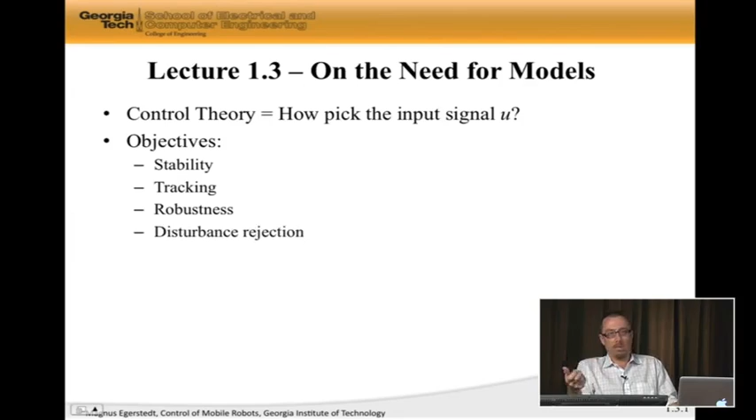I'm calling it robustness. A companion to robustness, in fact, one can argue that it's an aspect of robustness, is disturbance rejection, because at the end of the day, we are going to be acting on measurements, and sensors have measurement noise. Things always happen. If you're flying a quadrotor in the air, all of a sudden you get a wind gust. Now that's a disturbance. If you're driving a robot, all of a sudden you're going from linoleum floor to carpet, now the friction changed. So all of a sudden you have these disturbances that enter into the system, and your controllers have to be able to overcome them, at least reasonable disturbances, for the controllers to be effective.

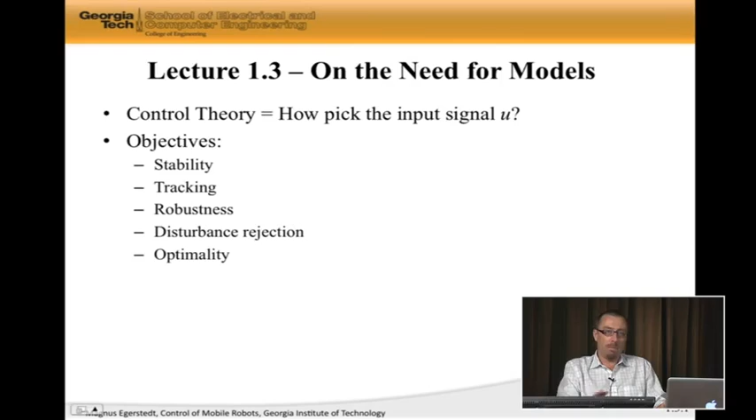Now once you have that, we can wrap other questions around it, like optimality, which is not only how do we do something, but how do we do it in the best possible way. And best can mean many different things. It could mean, how do I drive from point A to point B as quickly as possible, or using as little fuel as possible, or while staying as centered in the middle of the road as possible. So optimality can mean different things, and this is typically something we can do on top of all these other things. And in order to do any of this, we really need a model to be effective.

So effective control strategies rely on predictive models, because without them, we have no way of knowing what our control actions are actually going to do. So what do these models look like? Let's start in discrete time. This means that what's happening is that at distinct time instances, things happen.

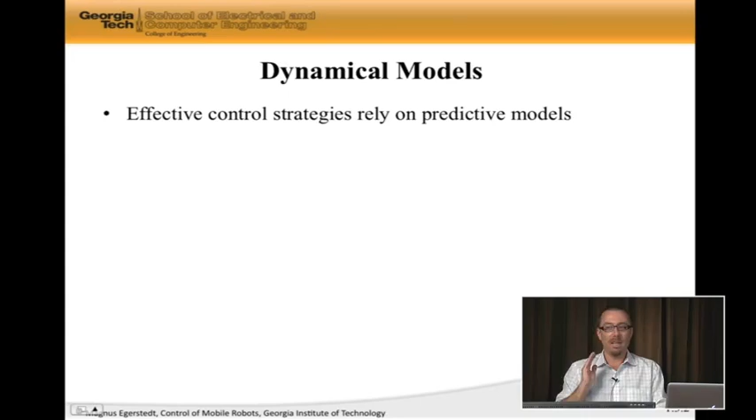In discrete time, what we have typically is that the state of the system, remember that x is the state, so this is at time instance k plus 1. Well, it's some function of what the state was like yesterday at time k and what I did yesterday. So the position of the robot tomorrow is a function of where the robot is today and what I did today. And then f somehow tells me how to go from today's state and control input to tomorrow's state. This is known as a difference equation because it tells you the difference between different values across different time instances. So that's in discrete time.

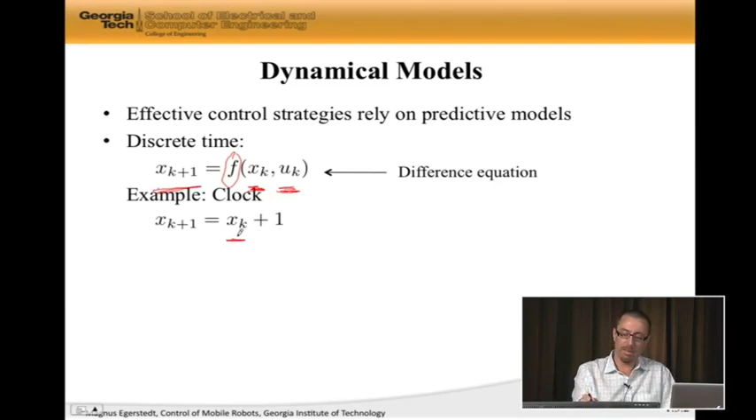And here's an example of this. This is the world's simplest discrete time system. It's a clock or a calendar. This is the time today. Now I'm adding 1 second, and this is the time 1 second later.

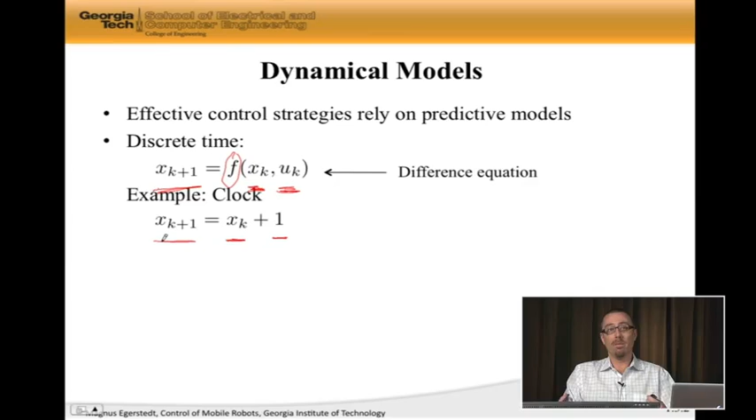So the time right now plus 1 second is the time 1 second later. This is clearly a completely trivial discrete time system, but it is a difference equation. It's a clock. So if we plot this, we see that here is the state, which is what time it is, as a function of time. So it's silly, but at 1 o'clock, the state is 1. At 2 o'clock, the state is 2, and so forth. And you get this thing with slope 1.

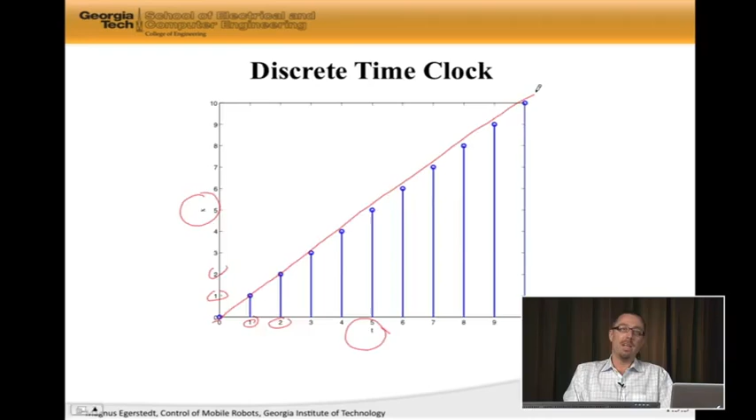So this would be the world's simplest model. There are no control signals or anything in there, but at least it is a dynamic, discrete time model that describes how a clock would work. Now, the problem we have with this, though, is that the laws of physics are all in continuous time. And when we're controlling robots, we are going to have to deal with the laws of physics.

Newton is going to tell us that the force is equal to the mass times the acceleration. Or if we're doing circuits, Kirchhoff's laws is going to relate various properties to capacitances and resistances in the circuit. So we're going to have to deal with things in continuous time. And in continuous time, there is no notion of next.

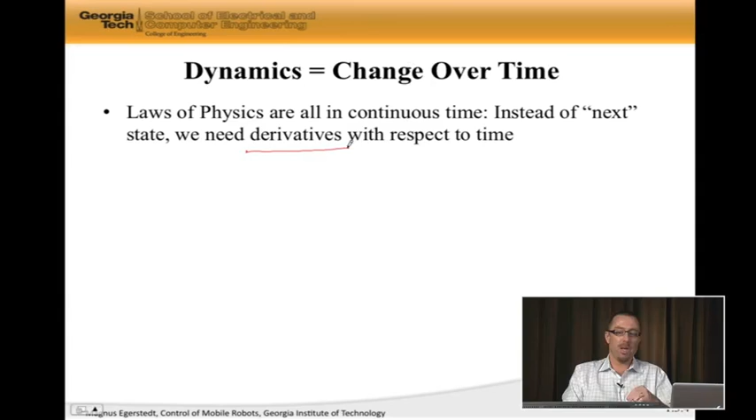But we have something almost better, and that's the notion of a derivative, which is not next, but it tells us the change with respect to time. So in continuous time, we don't have difference equations. What we have are these things called differential equations. And right here, you see that the derivative of the state with respect to time is some function of x and u. So this is not telling me what the next value is. It's telling me what's the change, instantaneous change.

And here is the same thing, but now I've written x dot instead of dx/dt. Time derivatives a lot of times are written with a dot, and I'm going to use that in this class. And this actually traces back to the slight controversy between Newton and Leibniz. So in 1684, Leibniz said, oh, I have this idea that I call differential, and Newton at the same time had the same idea. Well, this is Leibniz notation, and this is Newton's notation. And we're going to use the dot for time derivatives here.

The point is that these are both the same equations, and they are differential equations because they are relating changes to the values of the states. So if we go back to our clock, what would the differential equation of a clock look like? Well, it would be very, very simple. It would say that the rate of change of the time is 1, which basically means that the clock changes a second every second.

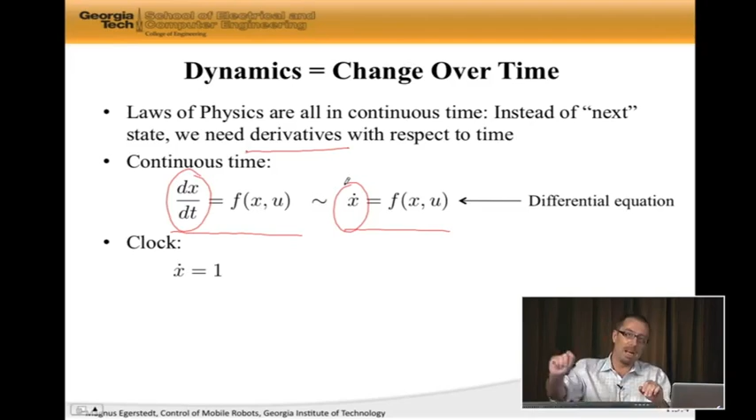That's what it means. So when I drew this picture of the discrete time clock, or I drew this line diagonally across it, what I was really doing was describing this. So this is the continuous time clock. X dot is equal to 1. And we are going to need, almost always, continuous time models for our systems. And next couple of lectures, we're going to start developing models of particular systems.

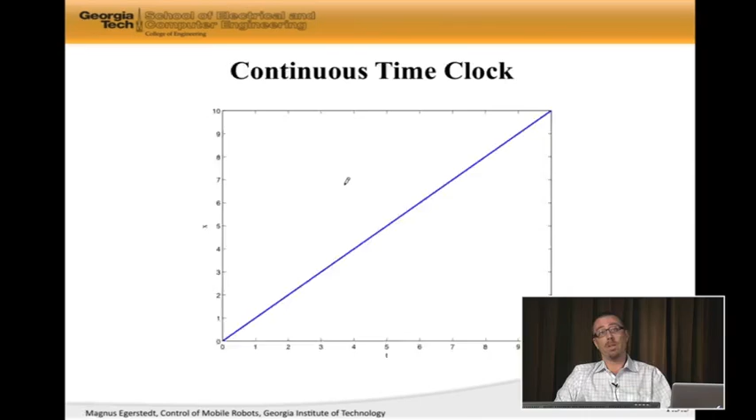But before we do this, I want to say a few words about how to go from continuous time to discrete time. Because our models are going to be continuous time differential equations. But then when we're putting this on a robot, we're going to put it on a computer. The computer runs in discrete time. So somehow we need to map continuous time models onto discrete time models.

So now if I say x at time k, well, it's x at time k times delta t, where delta t is some sample time. So we've sampled k measurements. Well, if I use this, what is x at time k plus 1, which is at the k plus first sample time? Well, I need to relate this thing somehow to the differential equation. So how do I do this?

Well, this is not always easy to do exactly, but what you can note is that this is known as a Taylor approximation. So x at the time k times delta t plus a little delta t, which is exactly the next state. Well, it's roughly what it was last time, plus the length of the time interval, delta t, times the derivative. So this is an approximation.

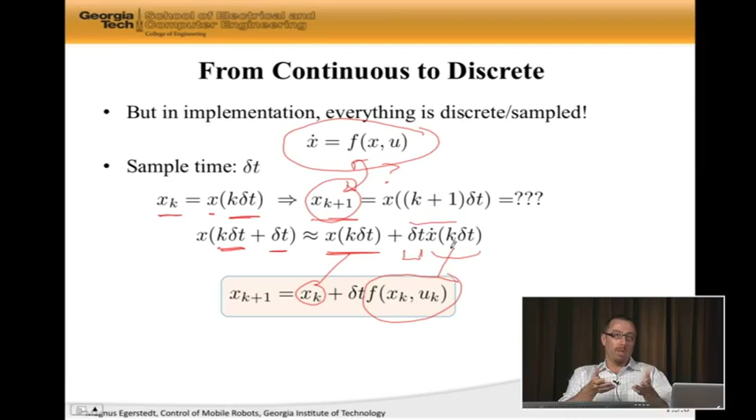But the cool thing here is that this x at time k delta t, well, that's xk. So these things are the same. X dot at time k delta t, well, that's f. So these are the same things. And then I just have to multiply my delta t there. So this is a way of getting a discrete time model from the continuous time model. And this is how we're going to have to take the things we do in continuous time and map it onto the actual implementations on computers that ultimately run in discrete time.